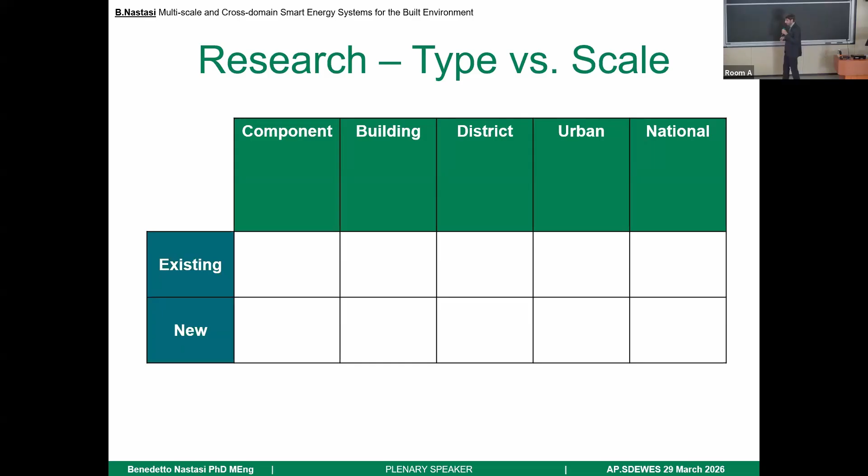So let's go to the point. The real issue with the built environment is that building scientists and energy planners do not talk too much. So I try to fill this gap, considering the different challenges according to the different scales that analyzing the built environment will lead to. First of all, the main difference is if it's a new built environment or an existing one. And if we think about Europe and China, this is already a big difference. And then all the scales you should take into account, because each scale requires different skills and expertise to analyze the problem.

Brief agenda. The title was cross-domain and multi-scale. So I will not really go in order, because there are effects of each scale on the subsequent one and the previous one, to account for the energy issue and the role played by the built environment in energy planning. So we will see examples of the different scales, but we need to understand first what the context is and why these cross-field skills are required to analyze this problem.

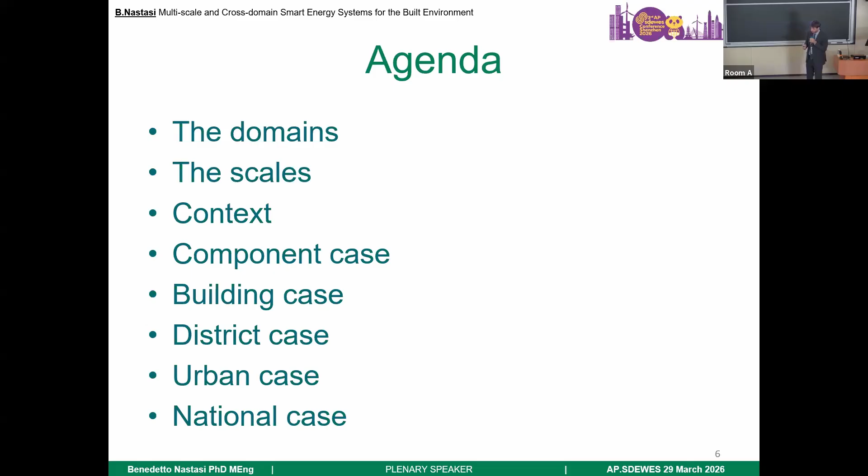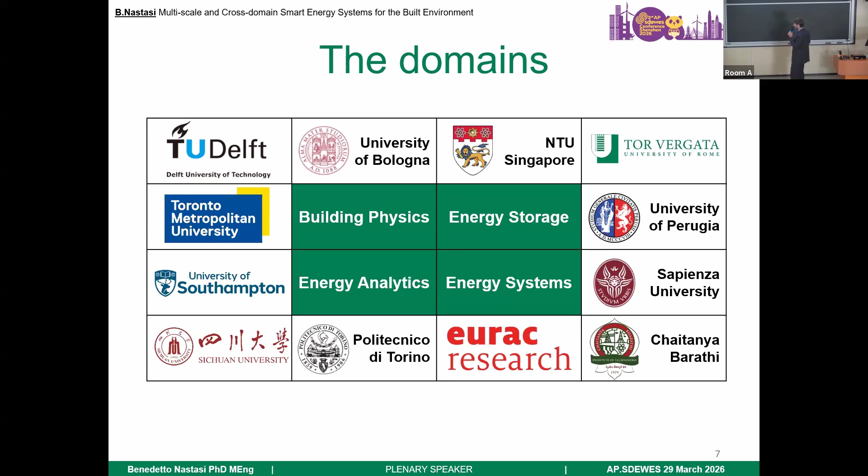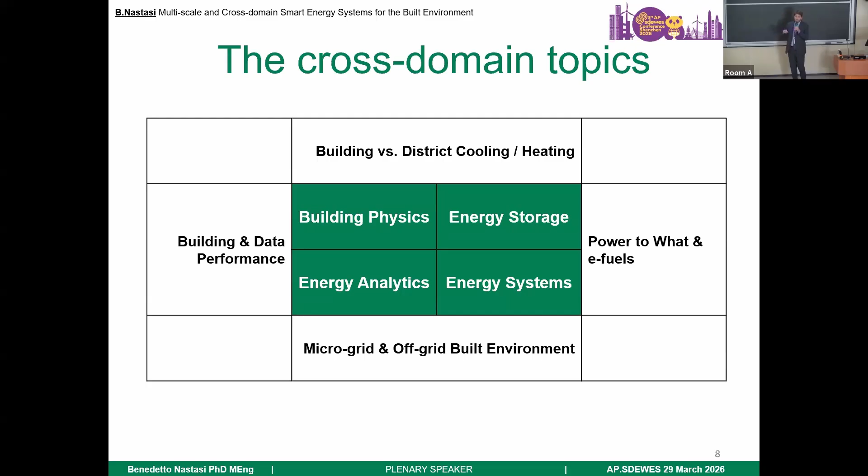Main domains, thanks to all the collaborations. This is my invited speech, but of course, without all the peers I have been working with, it would not be possible to be here, across four official domains: building physics, energy storage, energy systems, energy analytics, where we can identify topics that I try to summarize as cross-domain, but of course each topic will affect all the others in a different percentage.

Okay, what is the context? The main gap is that energy modelers see, for instance, the next 10 years scenario with energy retrofitting as energy saving in the results. While from a building science perspective, you can save energy reducing the operation, but you need to improve the performance. And there are different KPIs. If they are KPIs about energy use, you need to reduce, as you see in the second figure. But at the same time, you should comply with new standards.

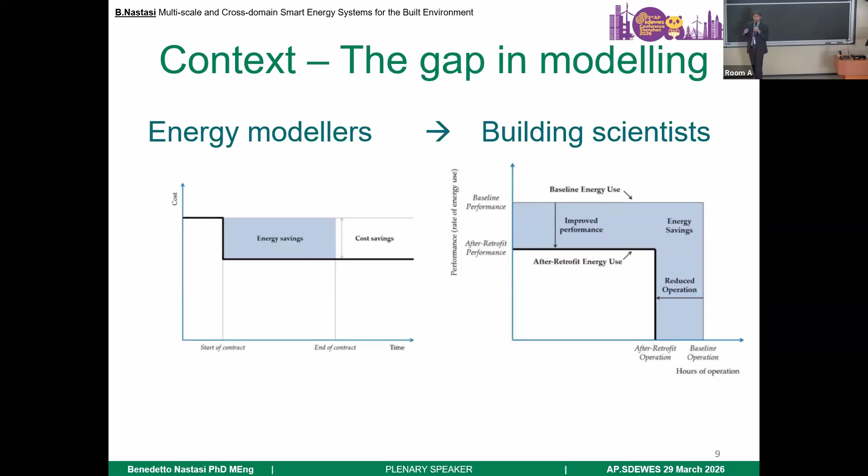So the standards and the requirements are evolving. It means that, from an energy perspective, you simultaneously have a decrease of demand and an increase of production. And finding the best way to do this match is always challenging.

And we cannot forget what the real application is. Here you see three different business models that usually characterize energy performance contracts, the business effect of whatever you do in the built environment. So among these three actors, the client, the energy service company, and the bank, who is really going to check the savings that you produce with your intervention?

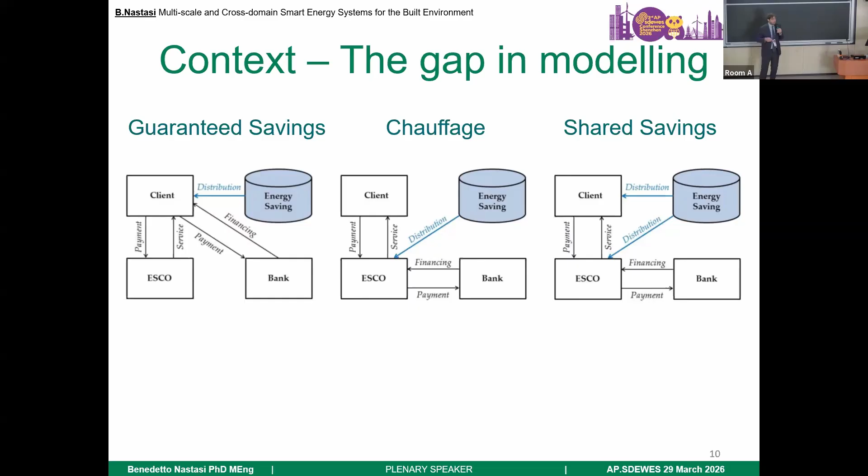And if the saving is core business for more than one actor, of course each one will try to push harder to get it. But this is different for usual citizens. They just allow the energy service company to take over the expenses, and then maybe they will pay less on their energy bill, unless it's someone that also has a core business in the built environment. So let's talk about building portfolio companies. Part of their core business is also managing the built environment effectively.

And I will go through a few steps in an incremental way during this presentation, keeping also how the collaboration finally was delivered to society, because the outreach of all this activity is the main core of my research activity.

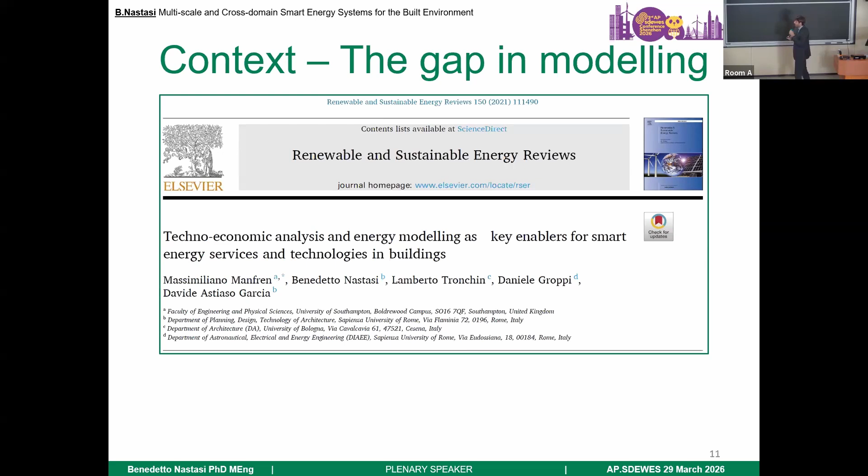I started with other colleagues to understand what were the main factors in energy planning and how we can go, especially in the different kinds of resolution, if you would like to solve a problem. And the first one, quite clear for the building scientist, less maybe for some energy system people, maybe for energy planners it is clear also, is that you need to check what kind of resolution you need for your analysis. And when we are talking about buildings, you cannot go further than hourly resolution. So if you say something about annual demand, annual consumption of a building, you don't say anything.

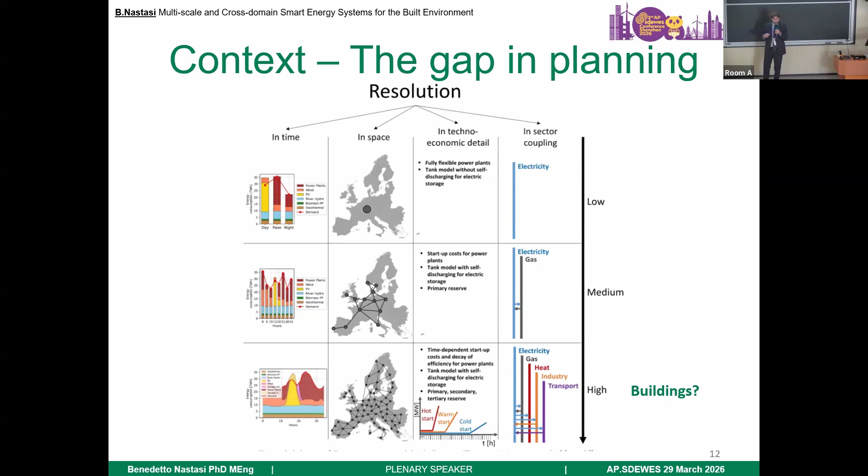So we need to start speaking the same language. That means we need to analyze the same resolution of models. Secondly, depending on resolution in other fields, you have to see if the data you have are currently able to be used immediately, or you need to pre-process this data. And finally, the first gap we identify in energy planning is that when we talk about sector coupling, we consider transport a sector. So many models look at transport as a separate sector, but buildings do not yet have this importance.

Let's talk about the context, without any detail that maybe can be neglected for people that are not working in building science. First of all, buildings are mainly weather-dependent energy users, plus occupant-driven energy users. That means that even in a country like Italy, a small country compared to China, the differences you have in climate inputs, from an energy modeler perspective, change a lot depending on where your building is located.

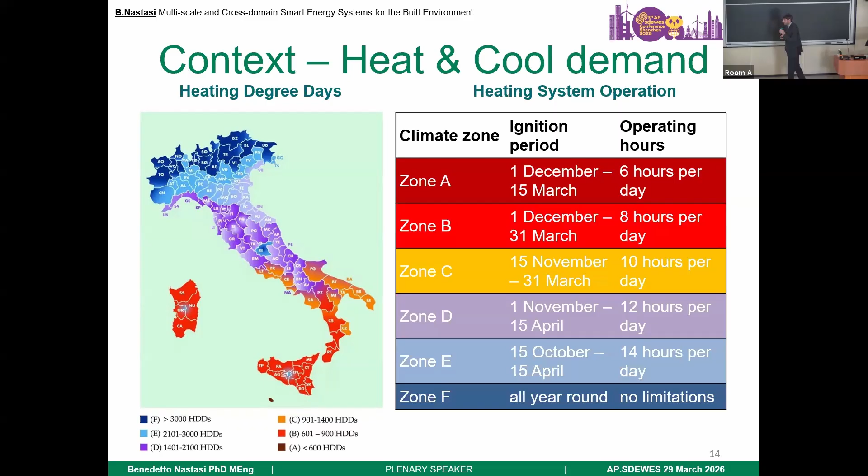Why is this important? Because the value of buildings depends on the energy label, and the energy label is not a fixed value anymore. As you see in the table, the building belongs to a class depending on a percentage of the performance of a reference building, where each value, each building envelope's thermophysical properties, for instance, depends on the year of construction. And because we need to comply with the decarbonization goals, and the decarbonization pathway means you need to take into account also the carbon budget, not only that you want to reach zero in 2050 or 2060, every 3 years there is an update of the limit value, and your building must deal with this new value every 3 years.

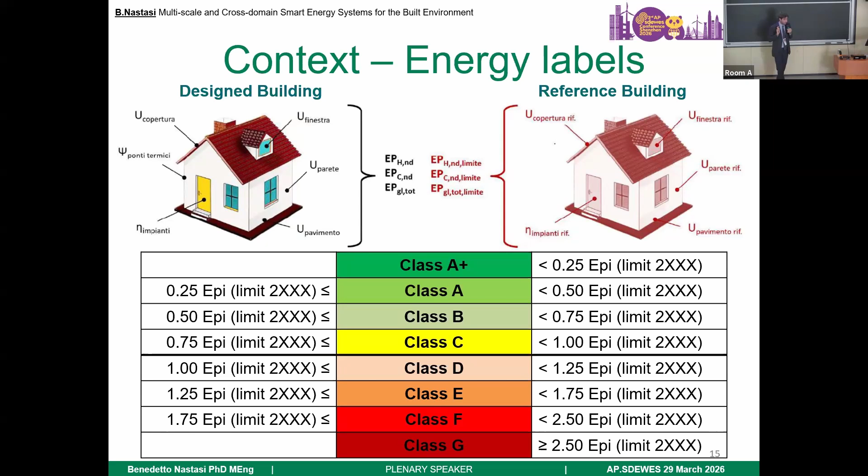So retrofitting is almost something that you cannot escape from anymore. Even if you do a very nice energy retrofit today, it's not said that you will keep this class in 10 years. So this is a complete paradigm shift. And if we look at the European directive, they also fix a limit year, 2035, when you cannot sell properties with a class lower than C. So if you cannot sell, the property doesn't have any value. That is quite strong, and that's why it's an important issue in energy planning.

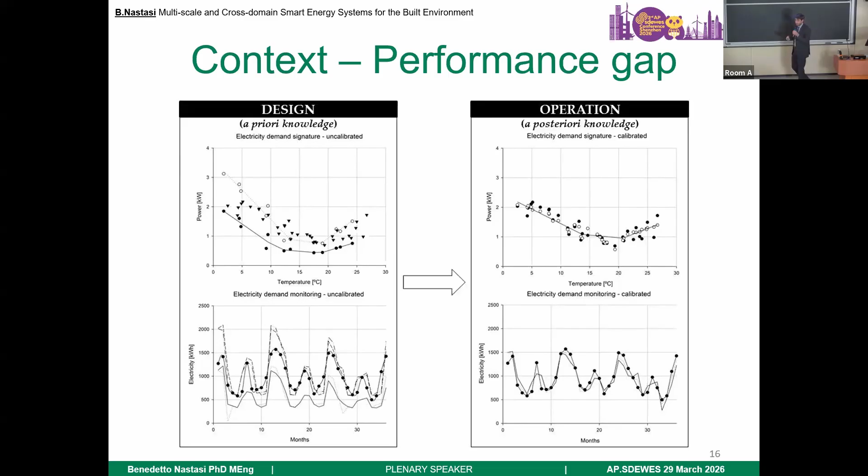And then if we go generally to energy modeling, but quite important for building scientists, our ambition is to solve this issue: the performance gap. You design a building, you predict how it's going to behave, but finally it's only operation that will tell you something. And operation is also part of how the energy system is going to behave, and eventually whether or not you get the targets you set when you designed the scenarios.

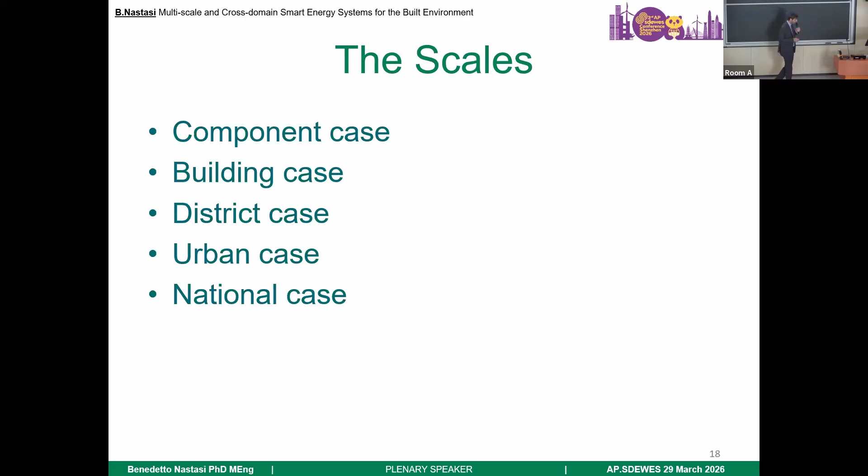So I'm going now across the scales, not in this order, trying to guide this journey starting from an example that maybe most of you already experienced. I had the pleasure to be one of the co-chairs of the SDEWES conference in Rome, and in the social event there was the visit to Galleria Borghese. Galleria Borghese is a very important building, preserved not only for its architectural appearance, not only the exterior walls, but also inside.

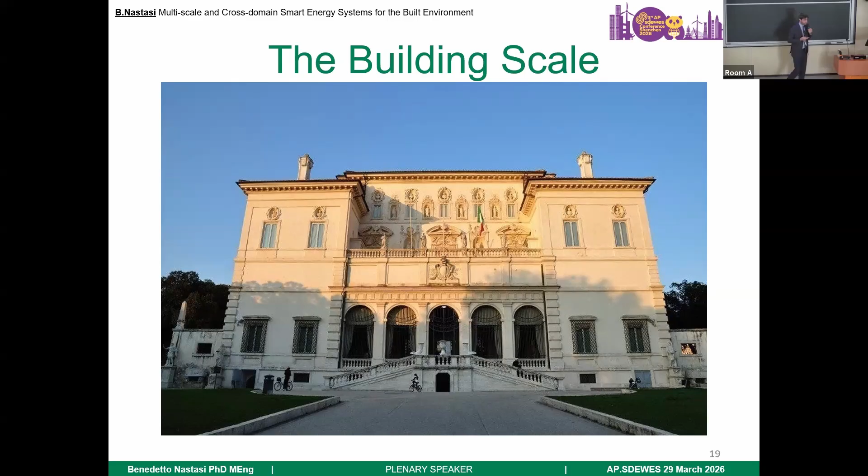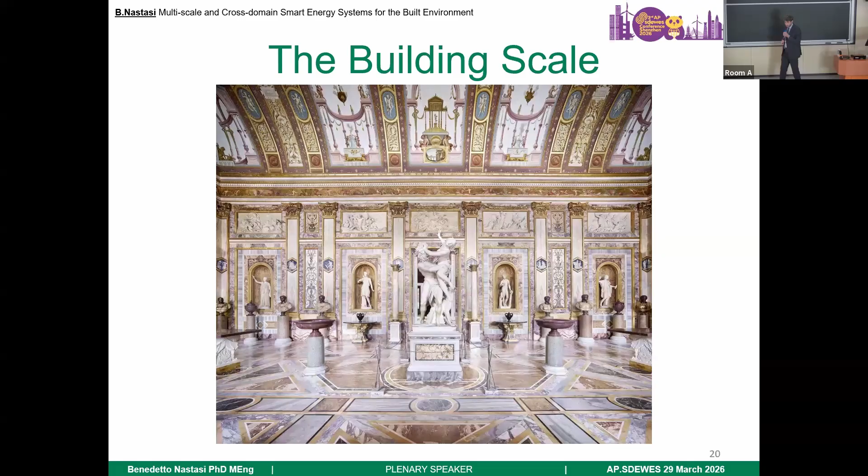Inside this, maybe one of the most beautiful buildings ever built, it is also hosting a very complicated thermophysical problem, that is the museum. So theoretically you cannot touch anything, but in some way this building has to comply with the Energy Performance Directive. How? That's the challenge. So the first really nice challenge between energy and architecture was how to make it as efficient as possible.

So that means that we located all the new HVAC systems that were not in the original design of more than 400 years ago as part of the spaces that were already used for the natural ventilation. So where you see the fireplaces, we put the terminals of the HVAC plant; where you see the way to extract the exhausted air that was driven naturally by natural ventilation, we put the extraction unit.

And where you see the technical rooms that were used mainly as a kind of room of cold air to then later be delivered through the building using all the cavities you see, not only fireplaces, but also between pavement and ceiling. So the idea finally was to deal with this challenge, but keeping the energy issue in a solvable way without touching the buildings.

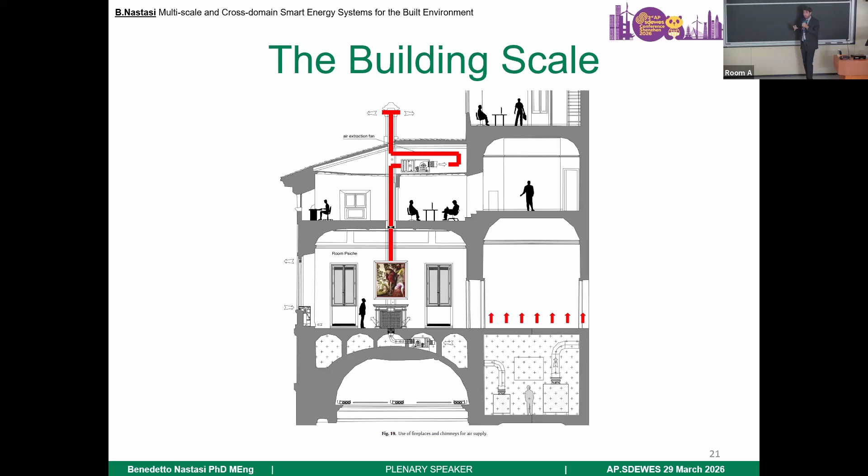So why do I make this extreme example? To say that we can solve even the most challenging environment, but we need to take into account all these features when we try to talk about the building stock behavior at national level.

So when we go to urban scale, that's much different. It happens to me in many conferences of energy planning that the building issue was maybe preliminarily solved, just saying, okay, just replace every heating supply with a heat pump. Let's put 3.5 COP, and then we have the total heating demand to be solved in the supply. Okay, from a building perspective, that's not possible.

What we can do is, of course, distinguish among the urban building portfolio what are the different levels of heating. Generally you have users that can be distinguished in high temperature, medium temperature, low temperature. That means 90 degrees for gas boiler, 55 to 65 maybe condensing boiler or a gas heat pump, or low temperature when you can deliver heat at 35 degrees, or with the new buildings even lower, almost to ambient temperature.

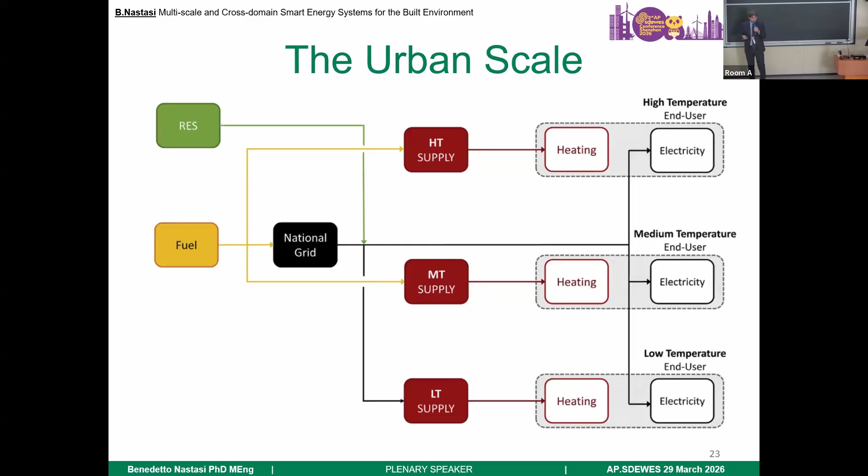So each user is to be identified for his electricity and heating demand, but this is not possible. You would need to run millions of simulations if your portfolio is made of millions of buildings. So what you do generally is to leave the electricity part as the built environment is composed now. This is an assumption that maybe in 10 years we need to change, when the electrification of buildings will be a relevant part. This is maybe still applicable for most European countries, but for some developing countries already switching to fully electrified buildings it is an assumption to be carefully taken into account.

But that means that each temperature needs a conversion system that is able to comply with this temperature. And the heating system terminals were designed for this difference of temperature. So you cannot replace a gas boiler with a heat pump without accounting that each terminal in each room was designed for a temperature difference of 60 degrees between the 80 degrees of the boiler and the 20 that you want to keep in the room.

We don't have to call the Fourier formula, but if we reduce the delta T, the temperature difference, we need to enlarge the surface. So your terminals must maybe be doubled, unless we also reduce the heating demand. And that's why we need to make the built environment efficient.

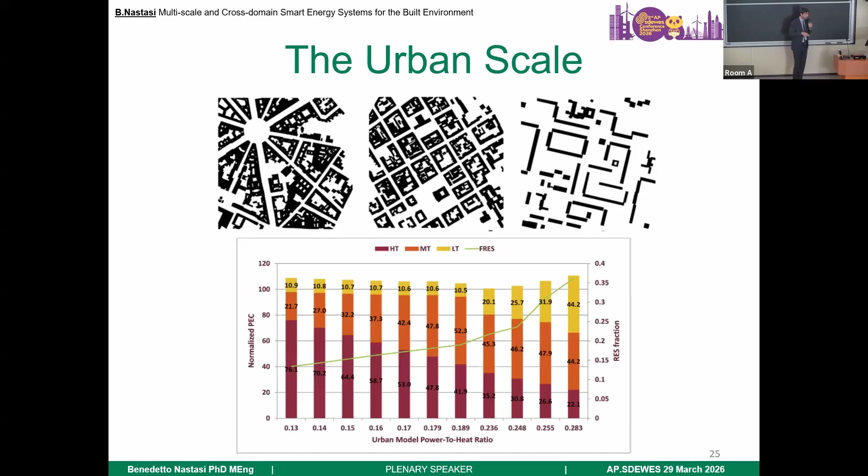So what we did was analyze three different contexts, Rome, Berlin, and Copenhagen, in terms of built environment, and see the differences in the share of high, medium, and low temperature in the demand, and, if we want to see at urban level the increase of renewables, what will be the effect on the primary energy. But this is not touching the building. You are just doing something on the energy supply, so on the conversion part.

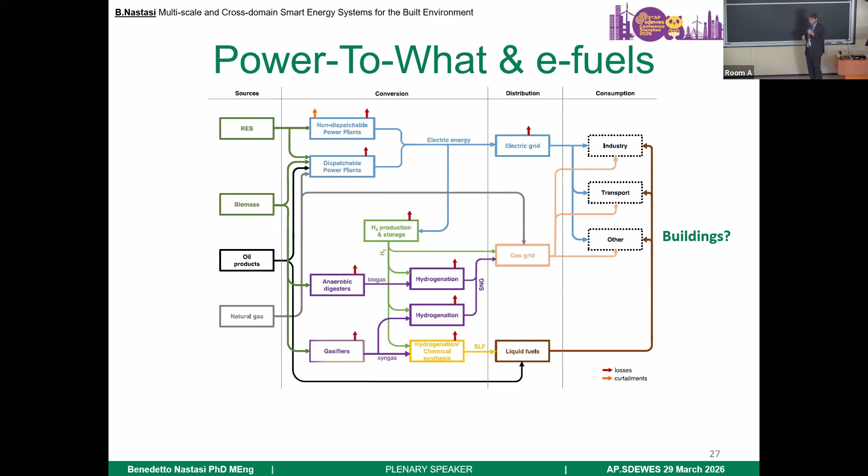At the beginning, we had an interesting discussion in Italy. Italy has a very high share of gas as the basis of thermoelectric generation, and also the use. 91% of buildings are heated with a gas boiler. So the challenge was talking about blending as a way to push people from the gas sector to say, okay, you say that it's feasible, do it in an indirect way to push for the development of electrolyzers. And we started thinking, okay, if they want to support this, what will be the result?

So how to integrate power to gas. That generally means that you can increase the direct renewable heat by a small percentage that is limited to what? To the energy supply that is high temperature. So the idea of the gas sector is to still have combustion. And then let's see the effect and compare with power to heat and the combined power to heat and power to gas. That means that we need to switch from the normal fossil fuel-based supply.

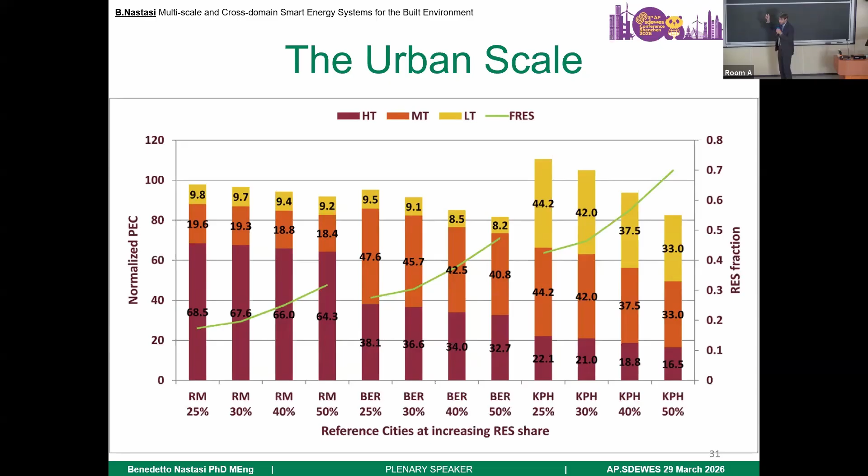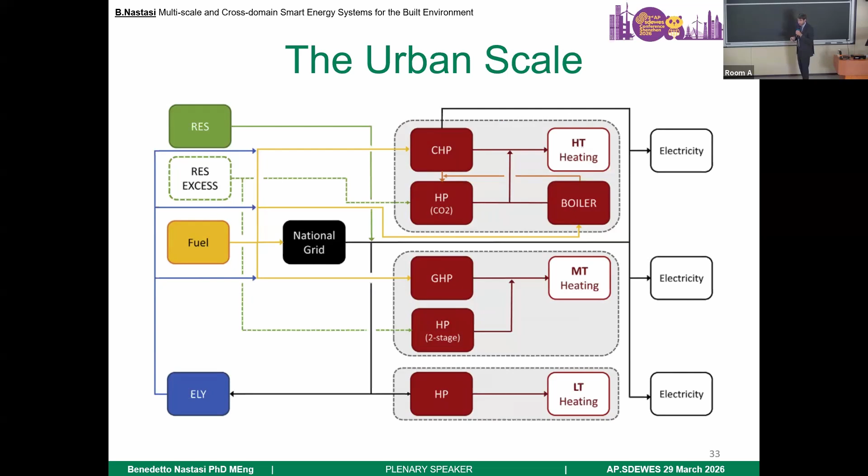But still limited. If you do just power to heat, you still have a lot of fossil-based heating supply. So the idea: let's merge. Let's do power to heat and power to gas contemporarily. In the transition scenario, you reach more than the sum of the previous two operations. I already know what the comment on this would be. Okay, but heating with hydrogen is crazy.

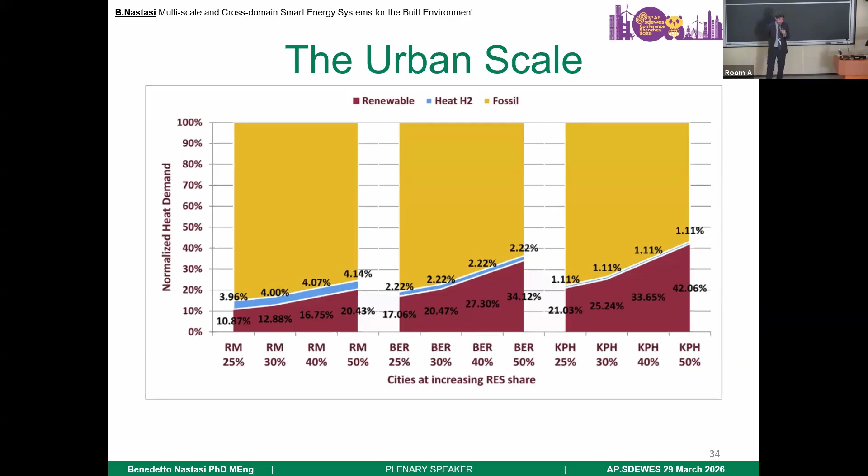Yes, but we are not talking about heating directly with hydrogen. We are pushing gas people to integrate it, because the idea at that time was to create the demand for electrolyzers to lower their price as they are developed, and then we switch. This is crucial because we can have other kinds of effects that are usually forgotten in energy planning, that maybe even the terminals are part of the things that you cannot change. Of course, these are extreme examples just to increase the complexity of the problem. Then we see the modeling issue and how we try to come to a solution.

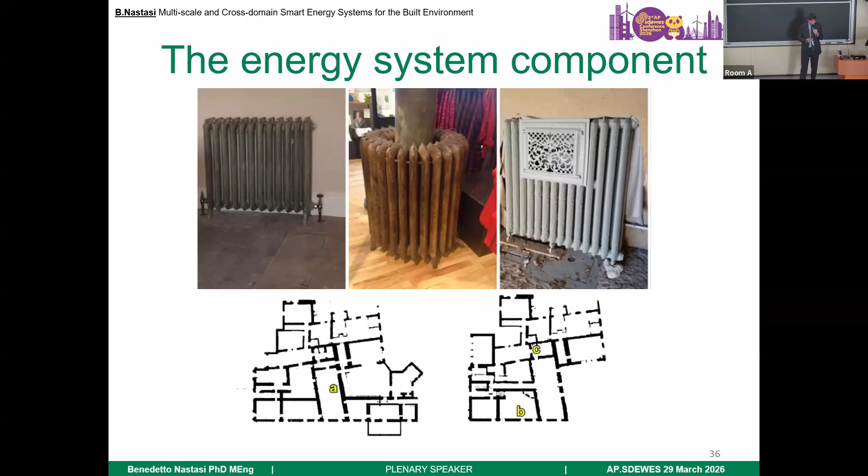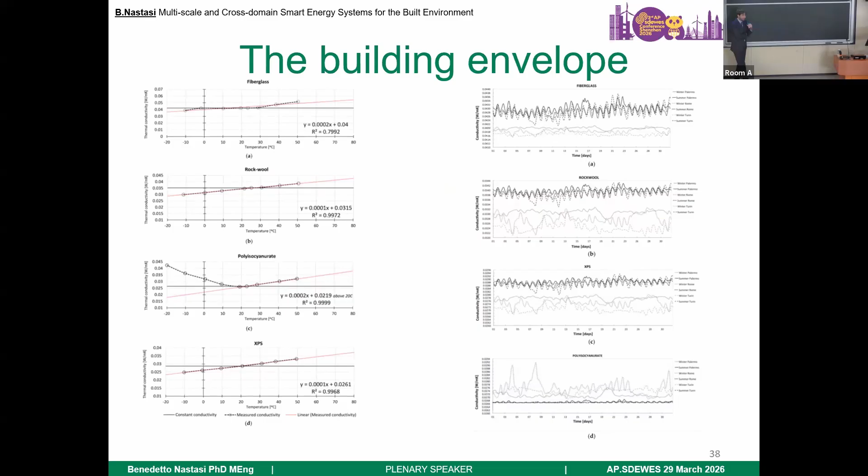The other one is that usually you talk about energy retrofitting considering fixed values, but all the phenomena are dynamic. Even the conductivity of the building envelope changes its behavior with the temperature the building is subject to. So as you can see in this previous one, you model something, already the model is wrong, and the model can help you, when you compare with measured data, to select the best material, accounting for the climate condition. So there is no way to say this is the best material, the best insulation we can use, whatever the climate is.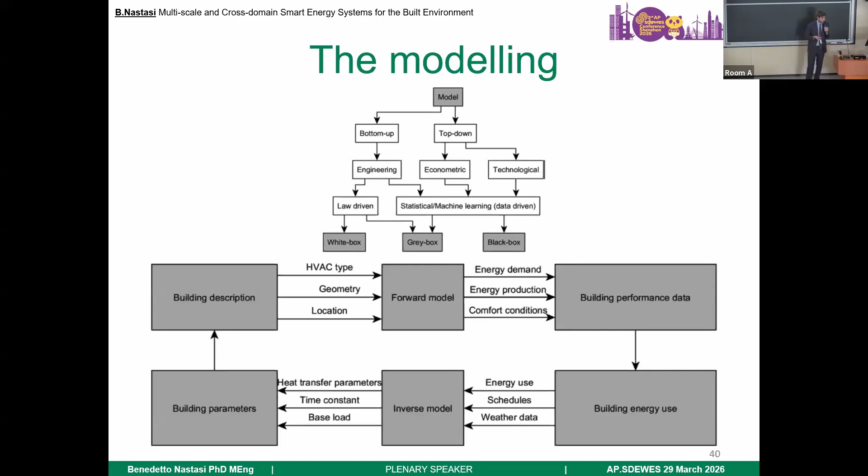And here we come to the first interesting result. Rather than thinking just of energy efficiency, let's switch to rational use of energy. What does it mean? That the energy retrofitting you do is not measured on how much energy you can save, but how the demand profile will change and how it can be used in a flexibility market. So maybe your building will consume more than with the most efficient intervention, but it can trade more energy, and the effect on the system will be much better.

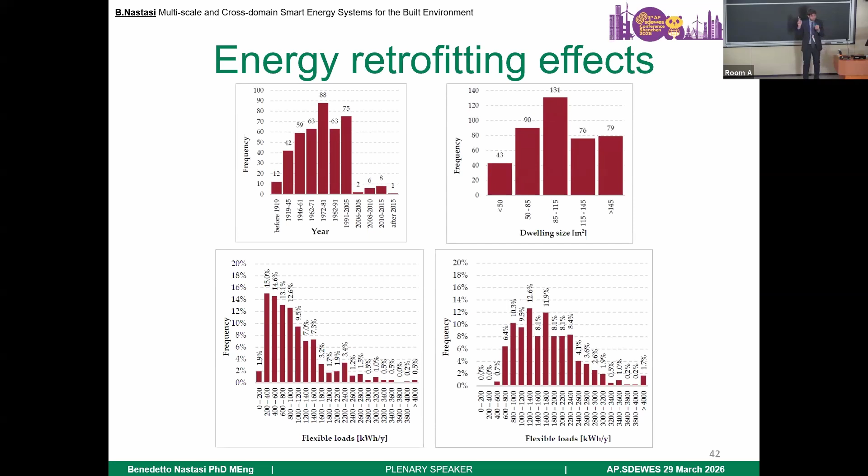So when you have a built environment mostly built in the 20 years after the Second World War, you still have to deal with high, medium, and low temperature heating. You cannot just say, let's do heat pumps. But when you change something, you can see at the bottom how certain electrification strategies can completely change the frequency of the flexible load, increase it, and put it as an actor in the flexibility market. Maybe this one will give you, in energy simulation at national level, much more savings than just reducing the demand of the building itself.

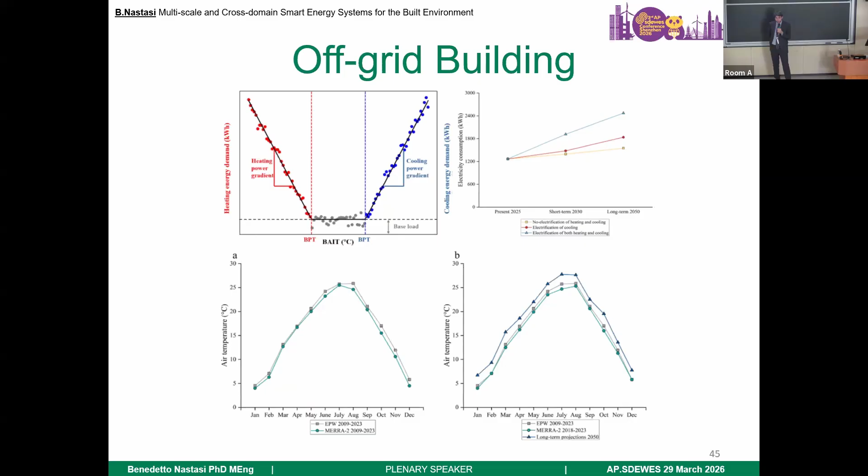Now, something that maybe is more interesting for our Chinese colleagues. So with a nice collaboration with Sichuan University, we studied what's going on in off-grid and grid-connected buildings in China. So that means that you should comply with some comfort temperature that you need to ensure, otherwise building scientists are not doing their job. And that means that you have changes.

You see the blue, the red, and the yellow dots, where you, for instance, electrify the different services and how it can change the demand, also accounting for the short, medium, and long-term scenarios. That means how the weather, since, as I said, a building is a weather-dependent, occupancy-driven energy user, how climate change will affect this way to behave.

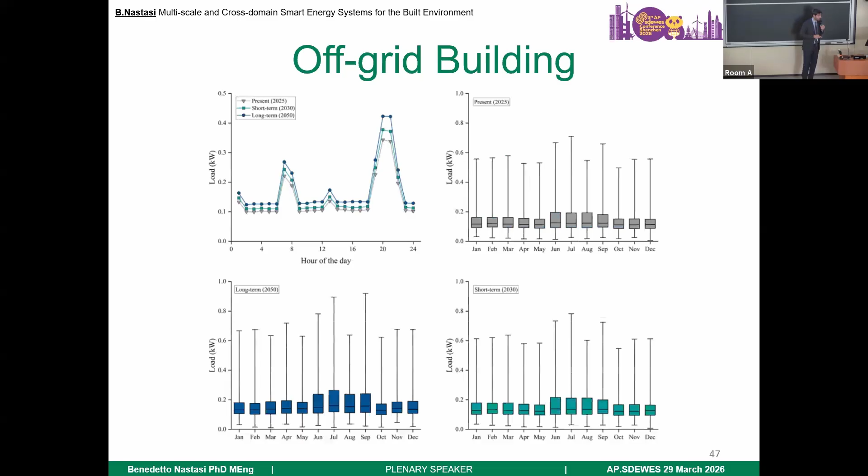And what is interesting is what you see in the comparison of this graph, that the same month projected in 2030 and 2050 at the bottom will require a different strategy and a different installation of renewables because something will change. So it means that resiliency of the built environment in terms of energy load has to be taken into account in the future scenarios.

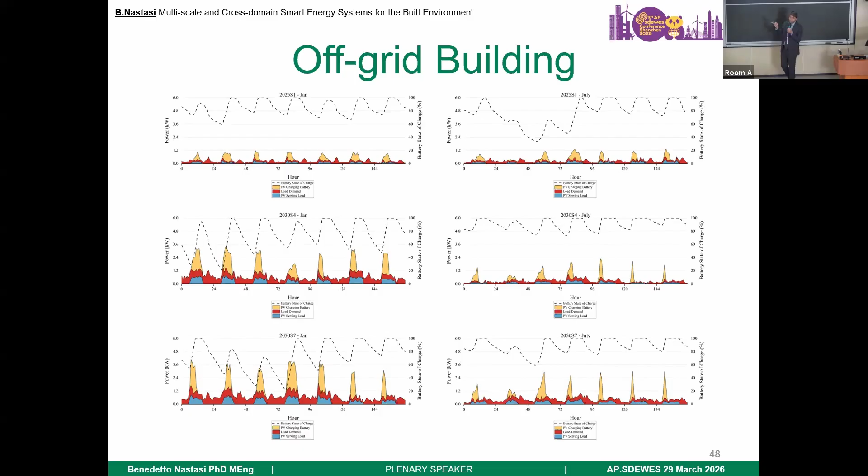What can change for the grid-connected buildings? First of all, you don't have so many constraints, no? In the off-grid, you need your building with most probably a very large renewable production locally, while you can use the grid as backup, as the way to balance what you are locally producing.

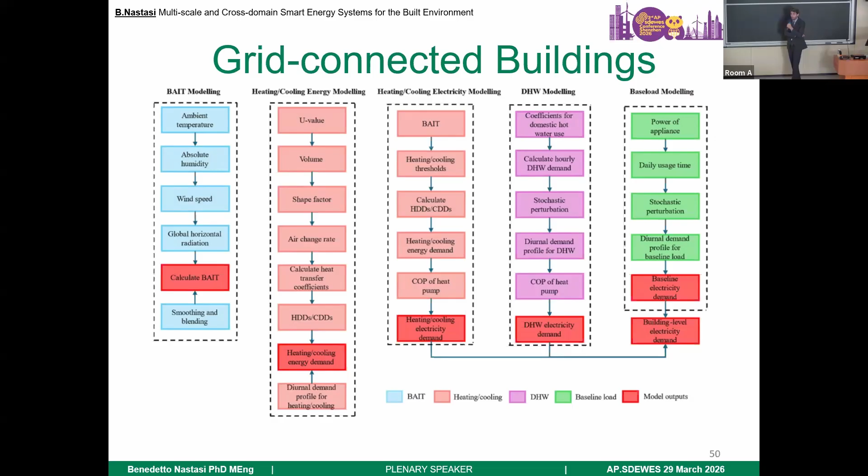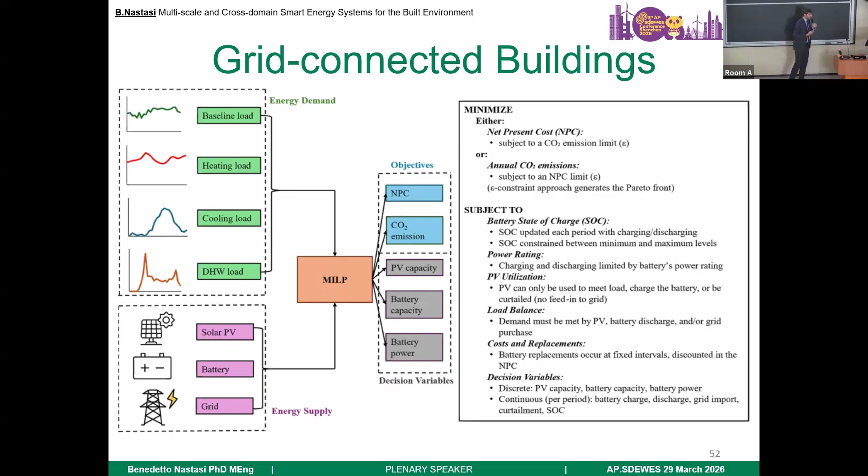But the interesting part is that from a building perspective, you are modeling so many loads, so the energy demand will be quite complicated. What is really useful in energy planning is what finally is the strategy to optimize this building portfolio. What does it mean, actually? That the study we carried out for 4 different conditions in China, so Harbin, Beijing, Chengdu, and Xiamen, will also affect what we define the carbon payback.

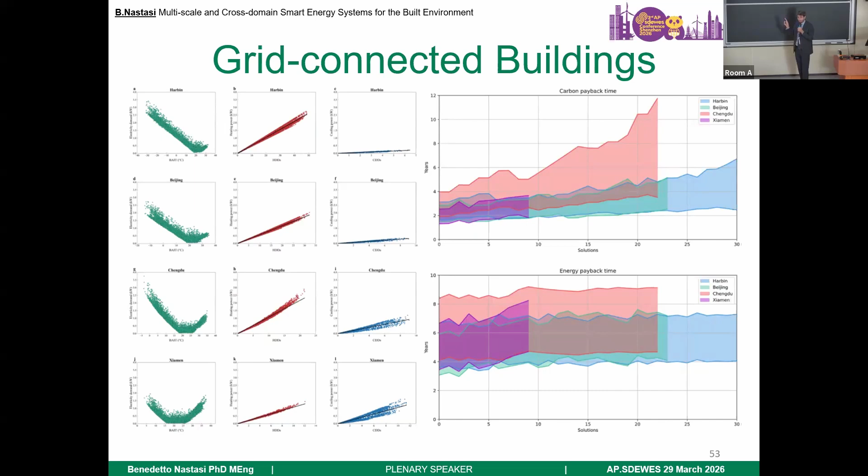So you are doing intervention in the built environment. They cause the increase of the embodied carbon emission of the buildings. So when will the savings of this carbon emission balance this investment? And this is quite useful if you want to do the future scenarios, accounting for the transition pathway. You cannot now just say, okay, in 2050, we will have 0 carbon emission. Okay, how to reach it? And that's the way. So we need to do interventions that also take into account your carbon budget and have to be tailored to the built environment.

That means that when you have your Pareto front of solutions, accounting for the minimum and the maximum, because you need to consider an interval of embodied carbon emission, it will change the results. And as you can see quite clearly in terms of investment, if you compare the different climates, if you have the maximum embodied carbon emission, it can happen that you do your retrofitting, the retrofitting is very expensive, but finally you erase your carbon budget available for the sector.

If you see the case in Xiamen, no? You have many gray dots that will be much more emitting and also much more expensive. So why go to that? The problem is sometimes we go there because we don't do the calculation of the embodied carbon emission for the built environment. So you think it's the cheaper solution from an energy perspective, saving energy, but then finally you are erasing more carbon budget. So the carbon payback will be longer than the date of your final scenario.

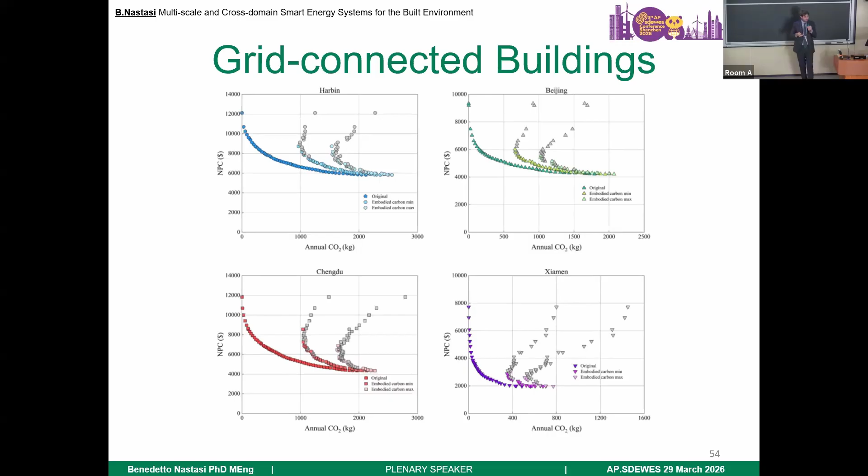This is interesting because you make many assumptions on the occupancy-driven aspects of energy use, but it changed a lot when the COVID-19 lockdown happened. And it changed not just temporarily, but also structurally. So after the COVID-19 lockdown, smart working became structural, not just a phase. So what does it mean?

That you design a building, you imagine a load profile, you verify the load profile once the building is built. Okay, maybe you were wrong by 20%, and for building scientists, 20% is very nice. If you look at ASHRAE, the American Society of Heating, Refrigerating and Air-Conditioning Engineers, they say, oh, wow, you got 20% from the real result. Oh, you were so good. This is nothing to say in energy planning, no?

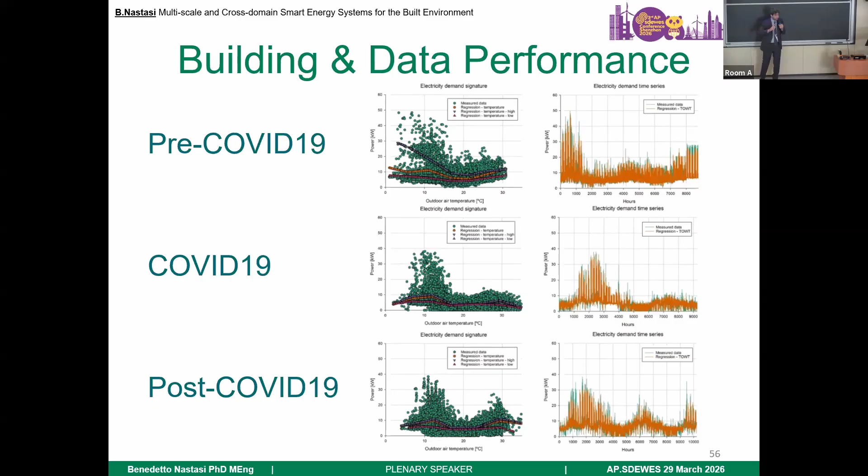20% is too much. Plus, you finally change all the assumptions because the load profile that you tried to predict was completely changed by the way we use the building. So roughly, you can see in the same period how the complete profile of those electrified buildings changed. And that means that if you would like to account for this performance as demand to trade in the demand response or flexibility market, then you have an issue.

So briefly for this, you have the green dots here, quite stable, these green dots before COVID. And after COVID lockdown, you have many more peaks. And this is not exactly maybe what you like, unless these peaks are in the same phase as the renewable production. If they are in phase with solar PV, nice. That's rational use of energy, it's not efficiency. So you are on time matching, and it works in terms of balance, okay? That means very nice for the energy community framework.

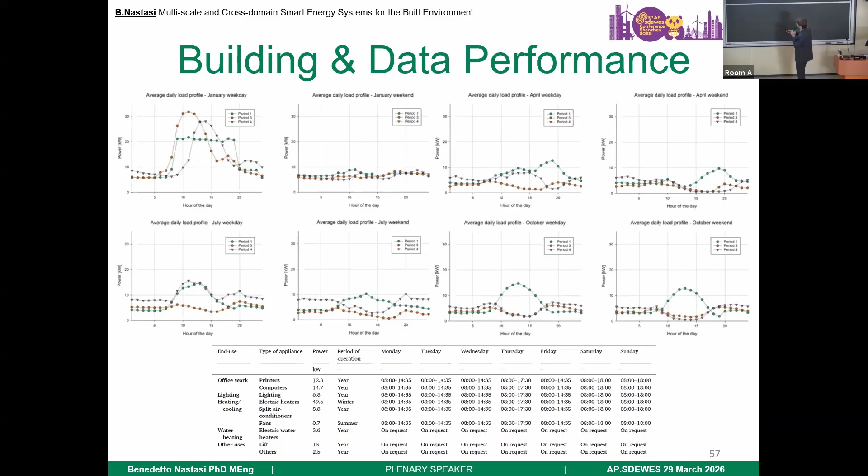And then it changes when you account for the different uses. Something changed completely if the building was already fully electrified. Because you read the differences I showed before, if you have a component for heating and cooling that is driven by another system, that is maybe not trading with the electricity market. But when the building is fully electrified, you should have one function that is accounting at the same time for occupancy-driven and weather-dependent factors, the two main forces for the built environment energy use.

And then you see the heat maps. We are talking about three completely different kinds of building. It's the same building, fully electrified, same almost 11-month period in 2018, 2020, and 2021. But in terms of energy balance, in terms of energy market, three completely different users. The energy models look at this, and you can guess that they are three different buildings, but from a building envelope perspective, from a system perspective, they are still always the same. The difference is how energy was used, because the occupancy changed a lot.

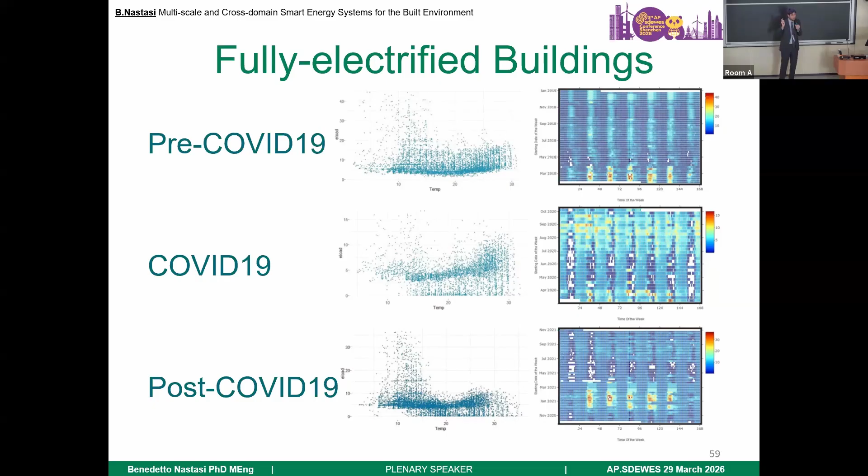We are going through the scales. It means that while you are planning the national energy scenario, you talk about thermoelectric power generation, thousands of megawatts. Here we are talking about thousands or millions of small components. Like this one is the open data analyzed for the heating generators, so mainly gas boilers, in the north of Italy. So we are talking about 4 million gas boilers. And the funny thing, when you try to make a prediction or to use other data for energy purposes, like, okay, when were those components installed, because maybe you can try to couple the nominal efficiency to the heating system. If the gas boiler was installed in 2000, then it would most probably be more efficient than the one installed in the 90s.

Okay, but then you go to the data and you find strange things like, I don't know, 30% of the heat generators were installed in January, in the middle of the season. Well, a little bit strange. You think maybe they were not working properly and the owner was obliged to switch. Or what happened in 2000? Why was new installation double the trend? There was some incentive, no? You start thinking about all these things.

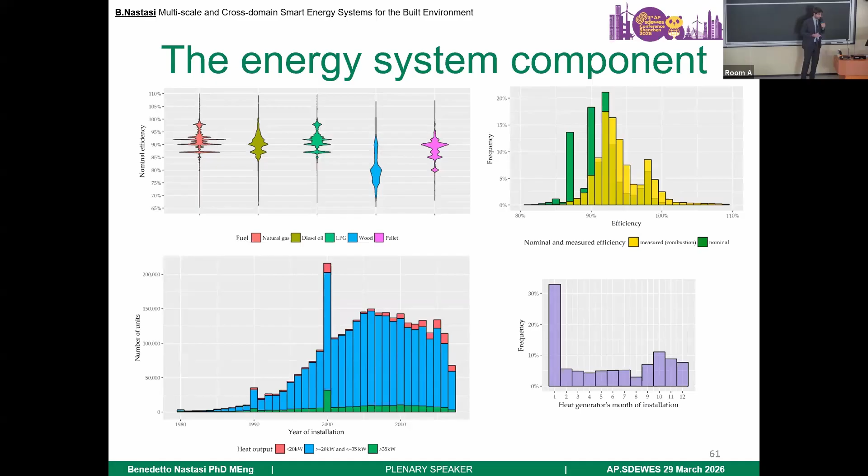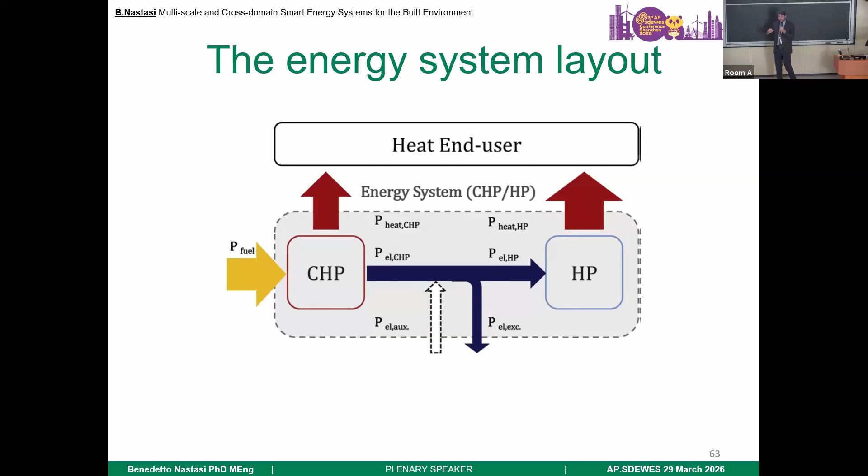We are coming to the conclusion. Each component then must be assessed also at system level. So if you are still within the building itself, or an apartment or building complex, and heating was for a while the only field where an objective function of efficiency must be defined and measured, it means that you try to combine systems. And what you would like to do is to give performance maps, like engineering in the 70s, where you can combine the systems to immediately understand the efficiency of the system. Okay, I combine a CHP and a heat pump. Okay, what will finally be the thermal efficiency of this system, to understand if it's better or not than a single component, or what are the sides.

So we are still accounting for the weather-dependent force in the built environment. That is not properly taken into account in energy planning generally. So this is a pre-process that you ask of the building scientists, but it finally has to be done as a pre-processing for the data.

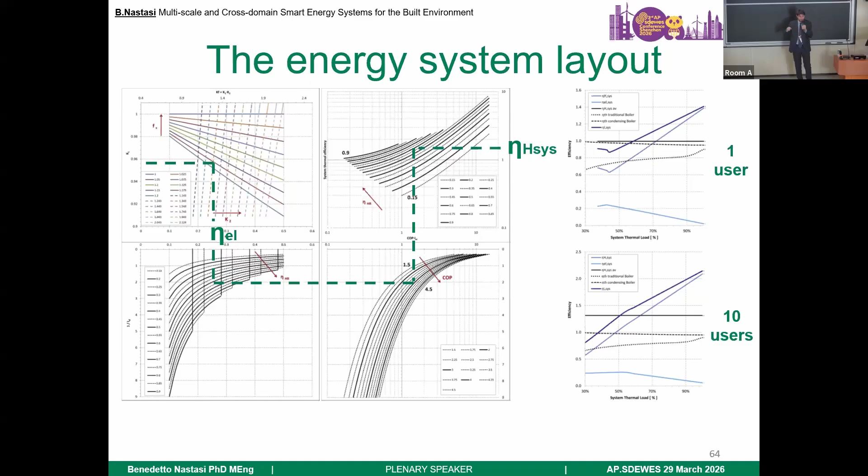This journey almost concludes at the district scale, because we are focusing a lot on districts, where there is this quite vague definition depending on the kind of sources that you would like to integrate. So the district case is now raising a lot of importance for cooling, especially now that the new buildings are data centers. So what does it mean? That rather than looking at the generation, you are looking at the use, analyzing what will be the baseline, the base load, that will be the data center, because you cannot interrupt this operation, because there is a business behind it, and there are services that must be delivered.

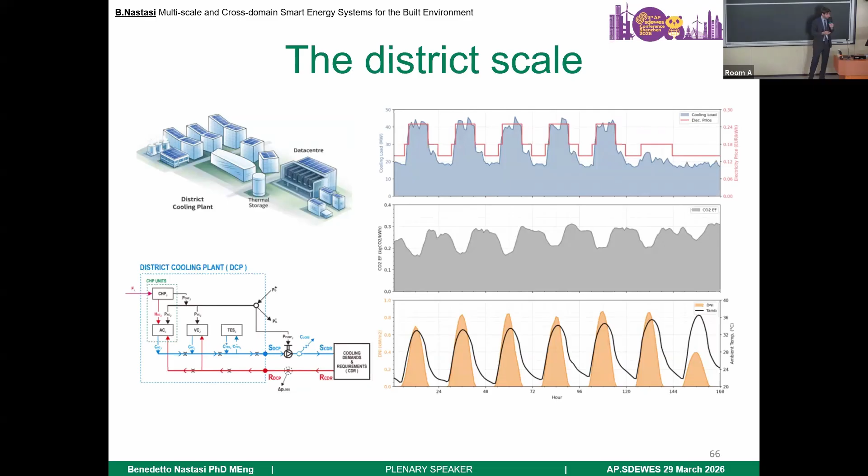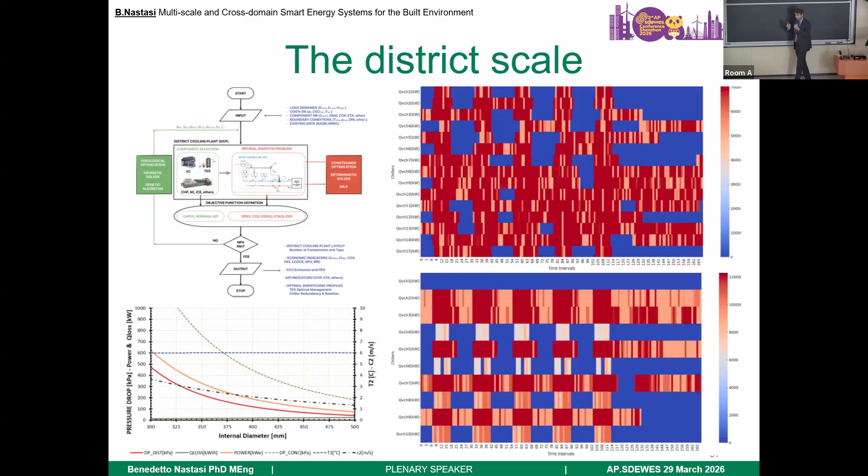So basically, rather than buy 15 machines and the associated capex, you buy less and you use more. So you see how ordered the use and the production of cold energy is when you can play with different elements like cold energy storage. That is something that usually you don't consider at national level. So what about the insertion of district cooling in your future scenario at national level? Almost nothing. Already district heating in some countries, like Italy, is still a very small contribution to the total energy demand, to the total energy supply.

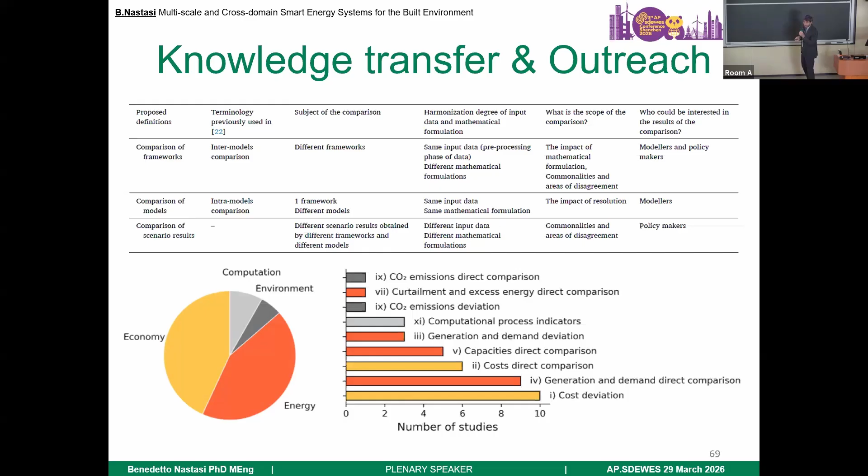Finally, why do we do all this? We do all this for the outreach of this research. The policymaker is not aware if you use TEMOA, H2RES, EnergyPLAN, TIMES; they see results. So that means it's crucial to be able to compare results from different frameworks, different models, different inputs when you provide something. It's clear that the built environment is still missing here, so we need to work a lot on this, because the focus is clearly on economy and energy outputs to do this comparison.

So I'm concluding the speech with these 4 open research questions. In many cases, at national level, the answer seems obvious, while it is not in the built environment. Like, are we going to electrify everything, or is there just a fuel exchange? Would it be possible for buildings to produce a kind of fuel and to exchange it with the networks? When we are going to install some distributed generation, we will change the supply, we do something hybridized. This hybridization should be accounted for in the transition pathway scenarios.

And energy retrofitting maybe has a different value. It is not an energy efficiency measure for the buildings, maybe it's an energy efficiency measure for the system. That means you can still consume more, but if you consume exactly on time, then you are solving the equation of the hourly balance, or something that I didn't say because it was a very recent reform. All the electricity markets now don't have hourly resolution. They have 15-minute resolution. And this is completely changing the approach.

So we were used to having the simplification, to say, okay, if we talk about watt-hours or just watts, in 1 hour it is the same number. Let's do it in 15 minutes. And to be sensitive as engineers to the numbers and say, okay, is this order of magnitude fine or not? At 15 minutes it is quite challenging.